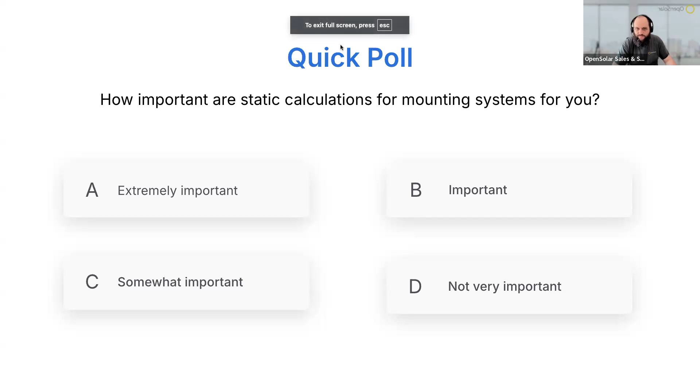So, the Renusol mounting system. I will walk you through the Renusol mounting systems portfolio quite quickly and focused. Renusol is a mounting systems supplier from Germany, based in Cologne. The company has existed since 1997, so we have more than 25 years of experience, based on simple solid service - our three pillars, which we're very proud of.

Speaking about the product range, we have flat roof products, and of course on-roof products. For tiled roofs, we have specialized products for the UK - plain tiles, pan tiles, etc. - with MCS certification on that product range as well. We also have nice products for metal roofs, corrugated roofs, trapezoidal roofs, and standing seam. Next one, please.

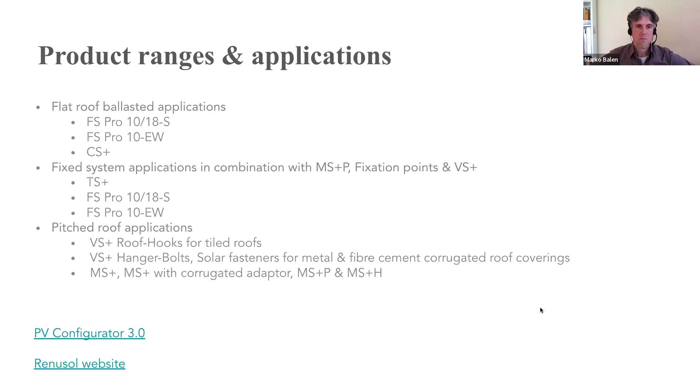What we're very proud about is our quality and certification. I mentioned 27 years of experience - we couldn't achieve that without quality and rigid quality control. We think that is very important for you as a customer, because you want the safety that the mounting material you're putting on roofs lasts for at least 20 years. We can warranty that due to several facts: our experience, and second, the extended certification that we undergo.

Which certifications are we pursuing? We have MCS certification for the UK, certification in Germany with the DIBT, a building approval institute, and certification in France with ETN. We also do a lot of other tests and trials to determine the functionality of our system, with TÜV in Germany, Kiwa in the Netherlands, etc.

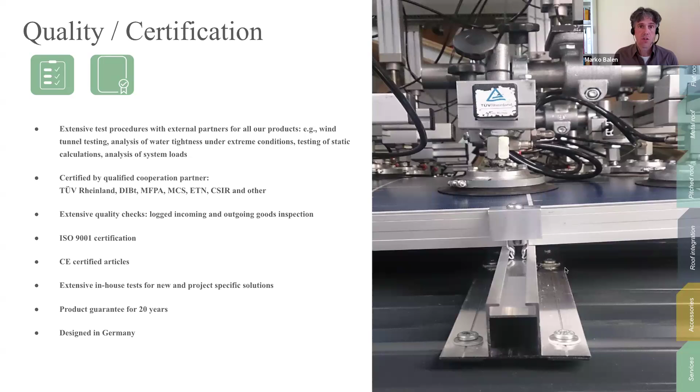Why do we want that? Because we think that the static calculation is very essential for the quality of the project. And therefore, we give you a tool, the PV configurator, which is available now in OpenSolar as well. With that tool, you can easily do a static calculation and ensure the quality of the system.

We are doing business in Europe and in South Africa. So you're seeing here the countries where we are doing business in, and where our systems are designed for these markets specifically. So we have, for the different markets, very specific solutions. I mentioned the UK - we have very specific solutions for the roofs that are in the UK. We have two colleagues on the ground in the UK who can support you, who can give you technical designs, who can answer each and every question and are happy to serve you.

Our product range and application is for every kind of different roof - flat roof, metal roof, pitched roof. And then we have, of course, our first-class services. We have a technical team, trained engineers who are doing designs for you, who give you help and assistance with your problems, specifically with projects which are more difficult, but you can call them at any time and they will give you advice and help. Of course, we have different accessories which I don't want to touch on in much detail, but everything you need, from potential equalization, grounding, different applications, are available there.

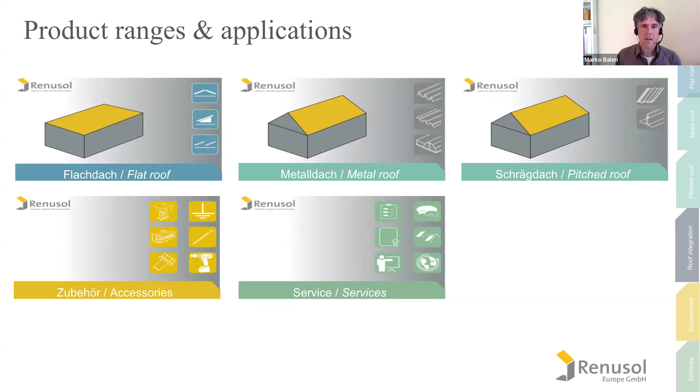So for the flat roof range, we can fix solar modules on every kind of flat roof. The difference with our flat roof systems is that they work until 5 degrees of tilt of the flat roofs. Many producers limit it to 3 degrees. We are not doing that because our systems are designed for temperature dilatation, so we can deal with roofs up until 5 degrees tilt.

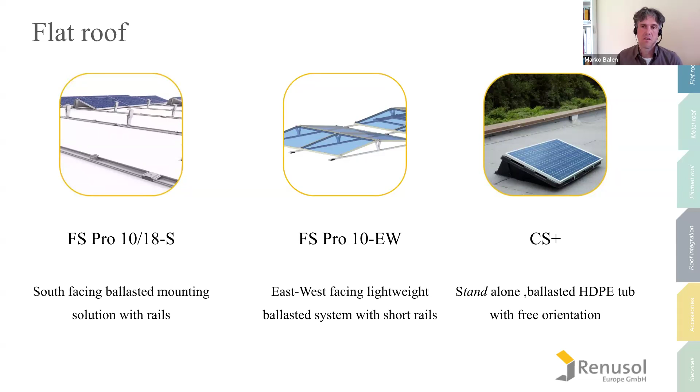Basically, we have 3 different product ranges: the FS Pro system for east-west and south-facing application, and the console, which is a plastic tub that can be put on the roof, which can then be filled with ballasting material, and then it's one component for one solar module. Very easy, no rail connection, very flexible on the roof, but of course you have a little bit higher need for ballast.

So FS Pro is our new standard for flat roofs. It's a pre-mounted system, so the rail, the protection pad for the roof, and the ridge support and eave support are already mounted to the rail, so you get one part on site. You don't need to do fiddly work on site. It's very quick to mount. We have the values there for the system - it's 30 to 40% quicker to mount than non-pre-mounted systems.

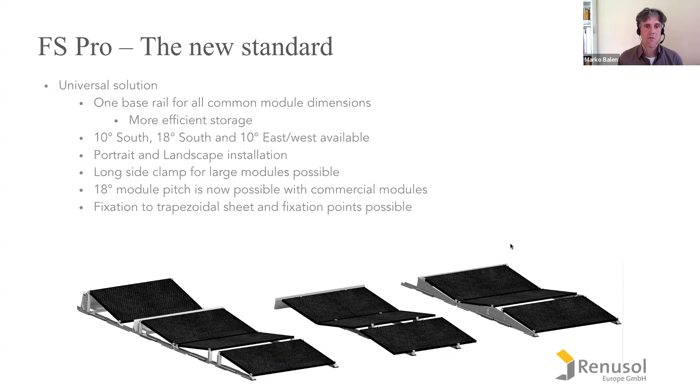We have different options for south-facing, for east-west facing, in 10 and 18 degrees orientation. We can put the modules also in landscape. All the testing is provided, and we have latest state-of-the-art wind tunnel testing, which is implemented in the PV configurator. And in the PV configurator, you can then do the ballast design, or you can give the project to us and we do the ballast design for you.

So I mentioned the high degree of pre-assembly, 30% faster to assemble than non-pre-assembled systems. 20 years warranty, reduction of diversity leads to simpler storage.

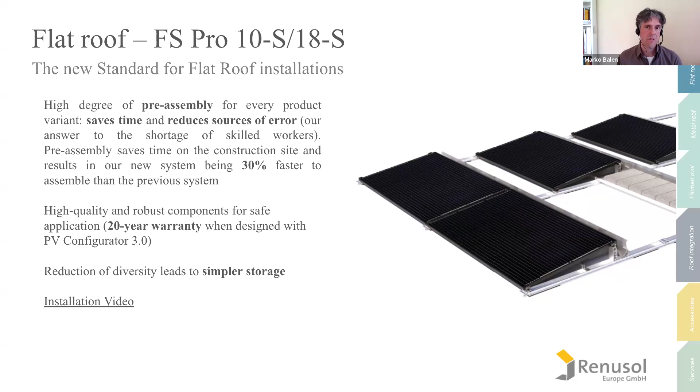So with the FS Pro, we can fit literally every module size in one rail, so you don't have the issue that with different module sizes, you need different mounting systems. Ours is universal. We have integrated potential equalization, so you are saving time there - you get the potential equalization with the product, you don't have to care about it. The ridges and the eaves are pre-assembled, and also the roof protection is pre-assembled - you only have to unfold. And you get nice side deflectors if you need them for a static reason or bird protection.

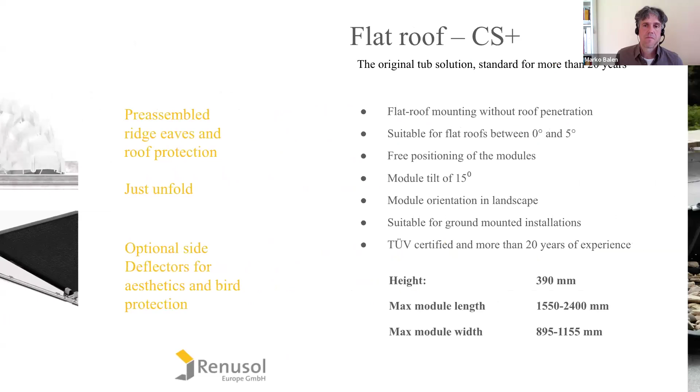Flat roof CS Plus is one of the first products of Renusol - more than 20 years that this product has existed. It's still very popular; people like it because it's flexible. It can be easily put on every roof. You don't have to use rails which connect the separate rows. And you can use it also on ground mount installations. We did big ground mount installations in the Netherlands and in Sweden, where multi-megawatt projects have been put on the ground with this system. It's very convenient because you don't need to ram profiles into the ground.

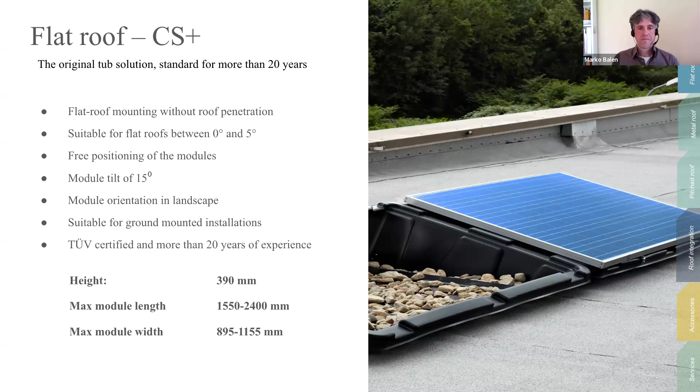If we want to install modules on, for example, tile roofs, and they should have a tilt, or trapezoidal roofs or standing seam roofs with a tilt between 10 and 35 degrees, the TS Plus is the right product. It's a triangular system, very flexible. We have a full static calculation in the PV configurator, very easy to install. So this is a product if you need higher tilt than 10 or 15 degrees.

Next one, please. So this is one slide which explains the different combinations.

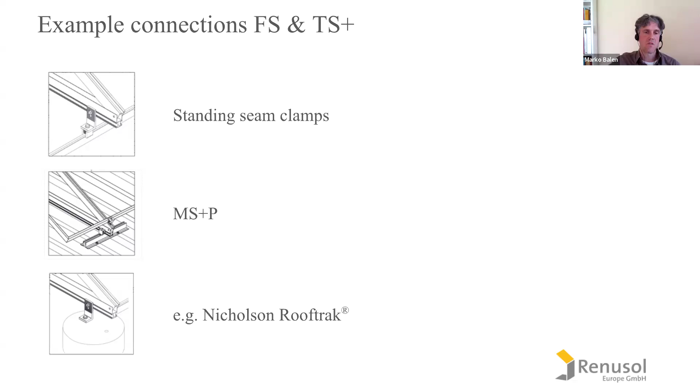So if you want to attach the flat roof system, the FS Pro, or the TS Plus system to standing seam roof, we have different very good standing seam clamps which you can use. If you want to attach it to trapezoidal sheet, it would then be the MS Plus range. We have also a cooperation with Nicholson in place, a very good producer from the UK, which provides integrated fixing points to all kinds of flat roofs, and the holding values, the static values of these integrated fixing points are implemented in our PV configurator. So you get a complete design, not only for our mounting system, but also for the fixation.

Next one, please. So for pitched roof, we can mount the system on tiled roofs. We have a large variety of roof hooks which you can use depending on the exact roof coverage. I already mentioned standing seam, which is a

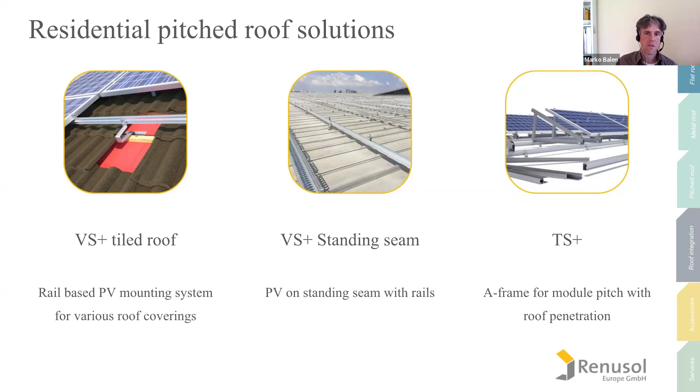quite an application which comes quite often. And then you have the TS Plus if you want to apply the modules with a tilt on the roof. Next one, please.

So for tiled roof, we have here the VarioSole. We have 22 different roof hooks in the portfolio for every kind of tile. We are always trying to reduce them, but it's very hard because, as you know, every roof in Europe looks a little bit different, so we have to provide all the variety.

Quite recently, 1 or 2 years ago, we brought out the Renusol RH1 roof hook and the RH flat. And the RH1 roof hook is very important because it has very high holding values, so it has very high static values. Therefore, you can save a lot of roof hooks on your roof if you do a static design, if you do a calculation in the PV configurator. Then you can save material, and not only can you save material and material cost, you can save a lot of working cost because you know that you need time to install every roof hook.

I don't know, 5 minutes or something, to notch a tile, etc., to install it, and you can save that by using components which have a high static capability and who have a static design. And using our PV configurator is a tool to make your system economic and feasible.

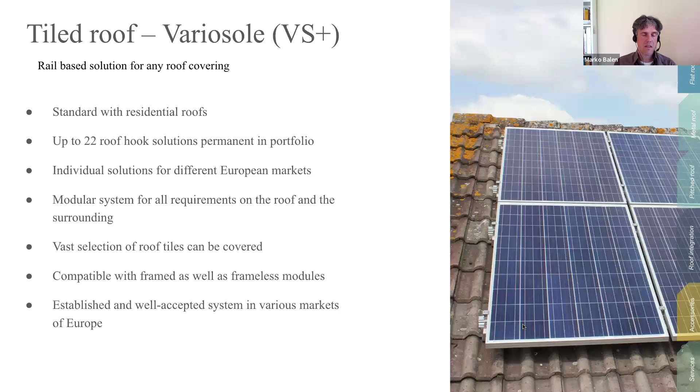Next one, please. So these are the roof hooks, the RH1 and the RH flat, extruded aluminum roof hooks with a wide area of adjustability. So you need less cuts, you have a stronger system, and you can fit it to literally all the roof coverings in the UK.

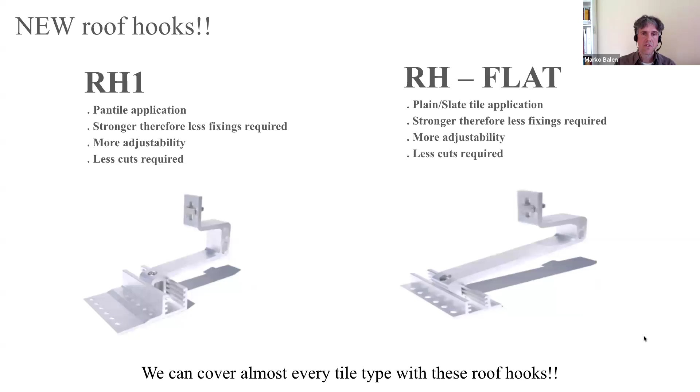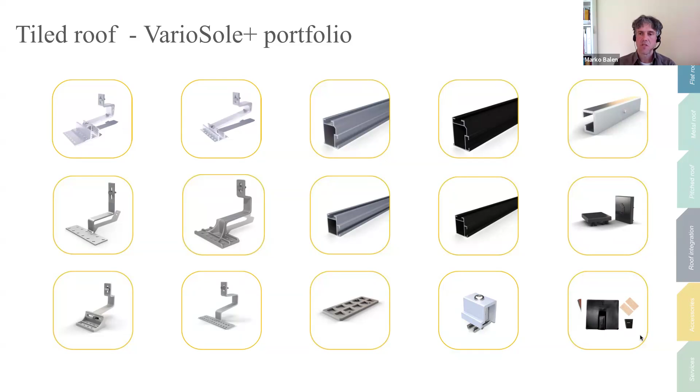Next one, please. So this is the whole portfolio for tiled roofs, different roof hooks, different rail, then end caps, universal, and then we have also flashings in the right bottom corner. There we have a cooperation with Genius Roof Solutions from the UK for the UK market, and they have designed specifically flashings for our product, and they go together very nicely. And we have tested them for the MCS, so we can prove they are watertight and you don't get any problems in 25 years of lifetime of your system.

Next, please. We can skip that.

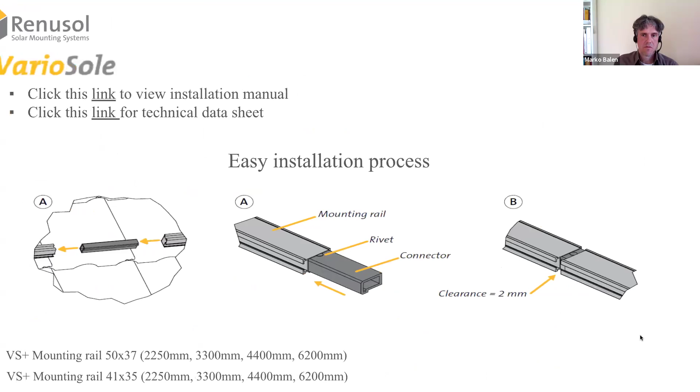So for metal roofs, we can either attach to the metal roofs with hanger bolts. Here we have a wide variety of different hanger bolts in order to get the right application. Next, please.

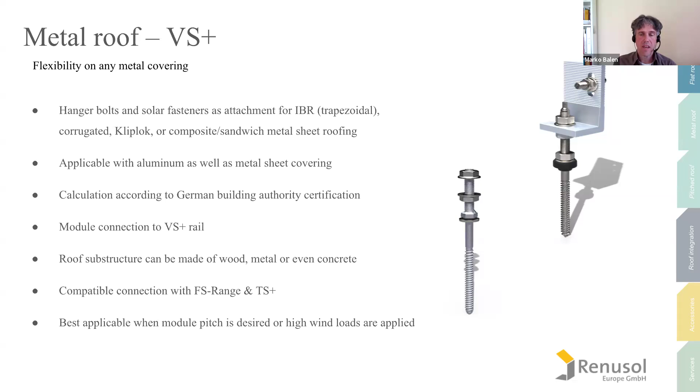Or we can use the Renusol system. And Renusol was the inventor of the short rail system on trapezoidal sheets. So we were the first company who did that. And we have quite some experience with that, and the market or other competitors have followed us with that system.

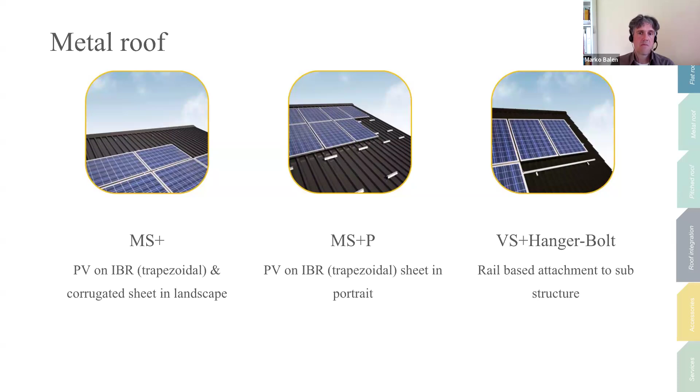If you go to the next slide, please. So we have this short rail, which is then attached with two metal screws to the trapezoidal sheet. No pre-drilling required, absolutely watertight, very easy to install, very quick to install, and very economic. Next, please.

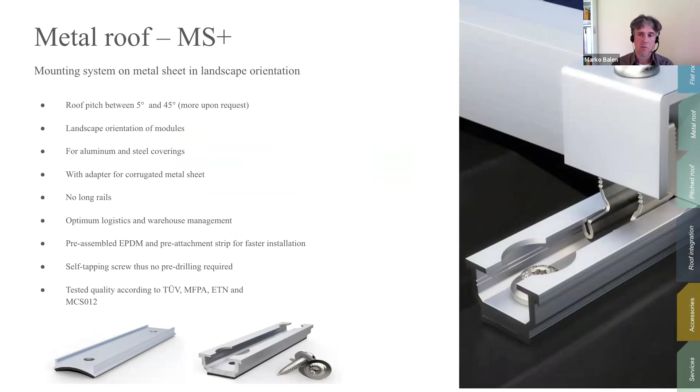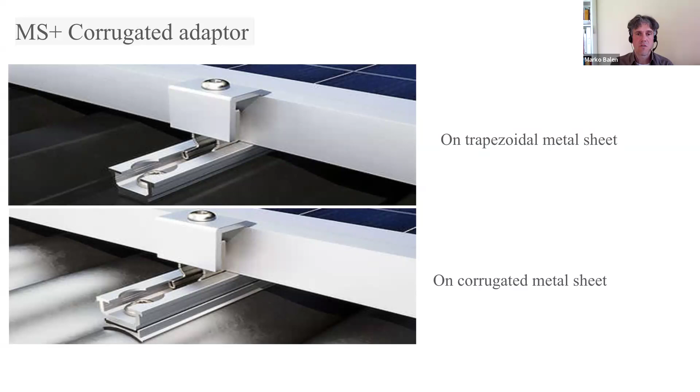So here you see also an adapter if you have a corrugated metal sheet, shown at the bottom of the slide. Next, please.

And if you want to install the modules in Portrait, we have the MS Plus Portrait rail. Next, please.

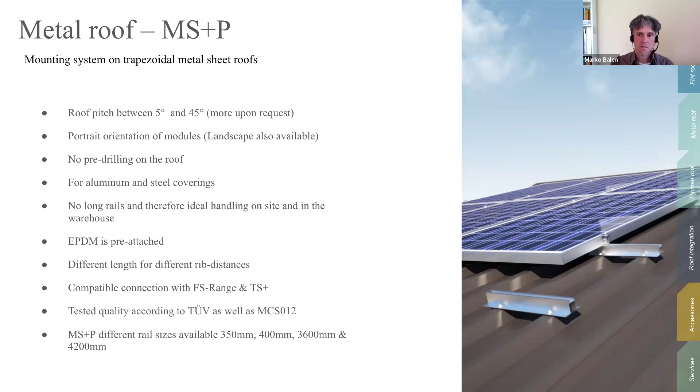So for every metal application, we have the right coverage, and not only do we have it, we have also made extensive wind uplift testing for all the combinations of different roof coverage and our mounting system, and can prove that it has the right holding values. Next, please.

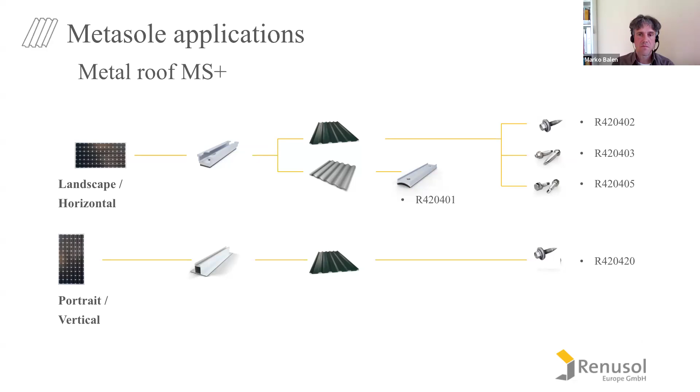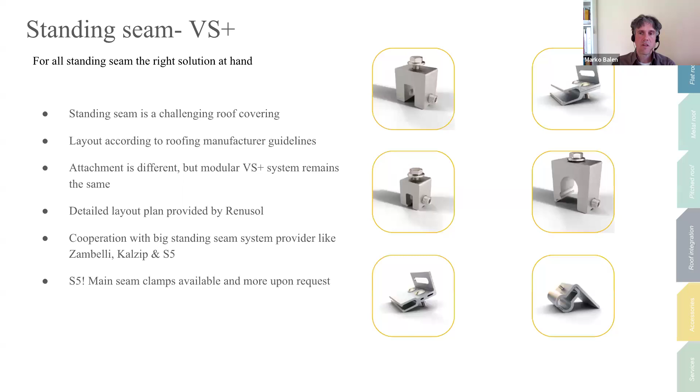So you see different seam profiles that you will find on the roof. And for all these combinations, we have the right system to fit on, and you see it also in our PV configurator, which one is right for your application. Next, please.

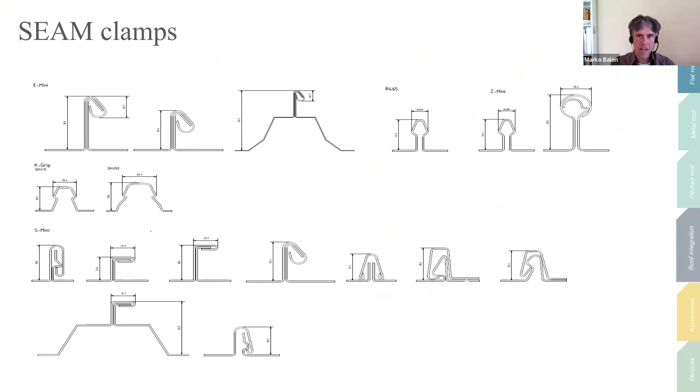Our module clamps are universal, and we were the first company to have a universal clamp ranging from 30 to 50 millimeter module thickness. And we are the only company which has a universal clamp, which is the RS1. I think it's on the next slide.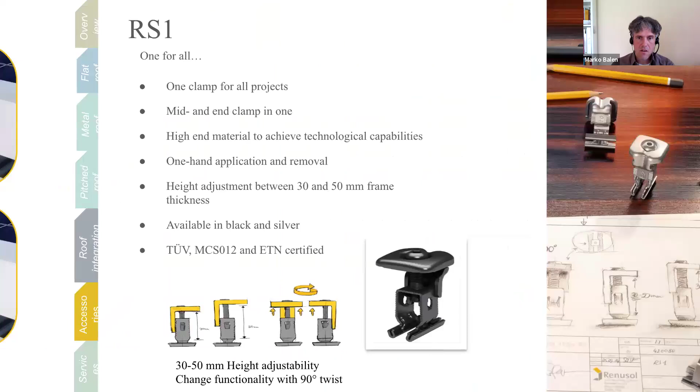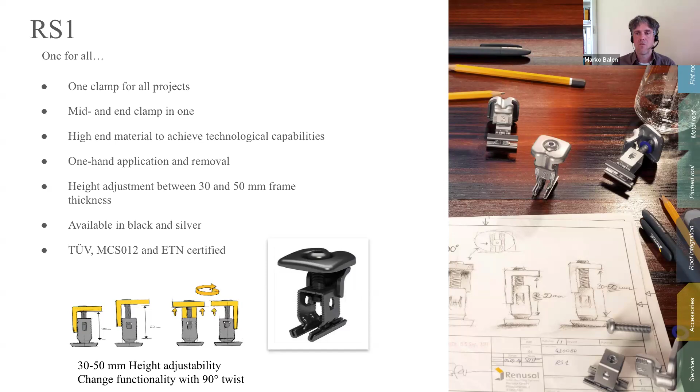Yeah, here we have the RS1, which is the Renusol 1 clamp. Here you have a mid and an end clamp united in one clamp. So literally you need on your job site only one clamp for all your applications. This is what we understand under simplicity. We don't need 30 different components. No, we need one, and we can do the job. Next one.

Different accessories for bonding, wire management. We have bituminous shingles. We have sample boxes so that you can show the product to your end customer. Next one.

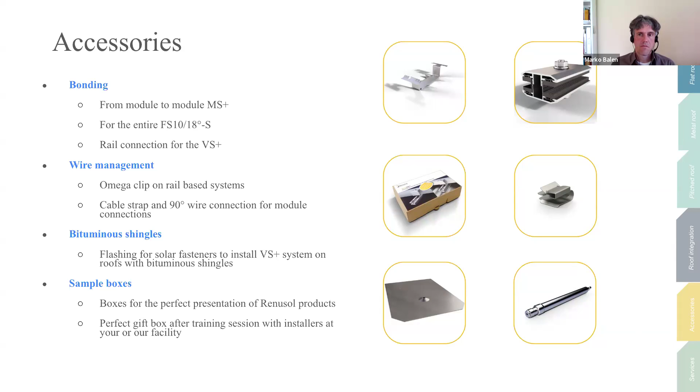And we have the nice PV configurator, which is the design tool for our systems. You have the implemented static calculation in it. And why do we want you to do a static calculation for mounting systems?

Yeah, 3 reasons. One is safety. We want the systems to be safe on the roof, and if we do a static calculation, we can ensure that safety, so it's for your own peace of mind. Secondly, it's reliability. You want it to last for 25 years. We want systems that stay on the roof, that don't fly from the roofs, that don't cause damage and harm to people. So reliability is a second factor.

And thirdly is the warranty. We're giving you 20 years of warranty if you do the design, if you do a static design, because then we have a full-fledged system. Not only do you have first-class material, but you have combined the material with the calculation, and you can ensure that it's safe. So warranty is the point.

And we do believe that insurances will ask in the future about the static calculation of a PV system. This is the case in some countries. In some countries it is not, but this is a trend which is growing, and this will be the case within 1 or 2 years in all the markets, I firmly believe, so be prepared for it. The next one, please.

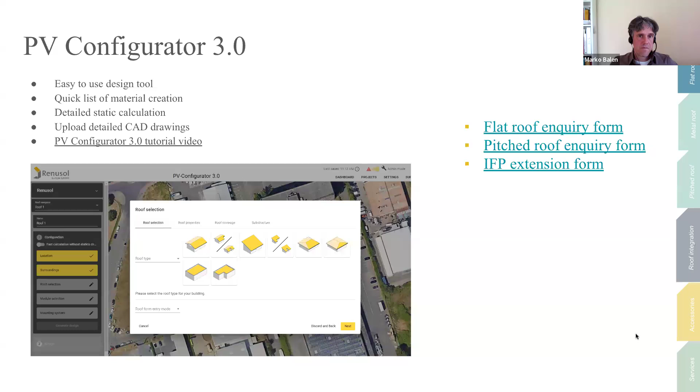Yeah, website renusol.com. You will find all the information that I have given you and much more. Next one. Thank you, that was the introduction to Renusol.

So now an introduction to OpenSolar. Hello and welcome, we're OpenSolar. We're mission driven to accelerate the adoption of solar and renewable energies globally. We're 100% free of charge for you, the solar professional, to use us. We cover the entire world.

Our core values and an overview of OpenSolar: we're world-leading solar design software. Again, we're free of charge, so you are free to grow, and it's built by solar professionals for solar professionals with a combined 400 plus years of expertise through the teams.

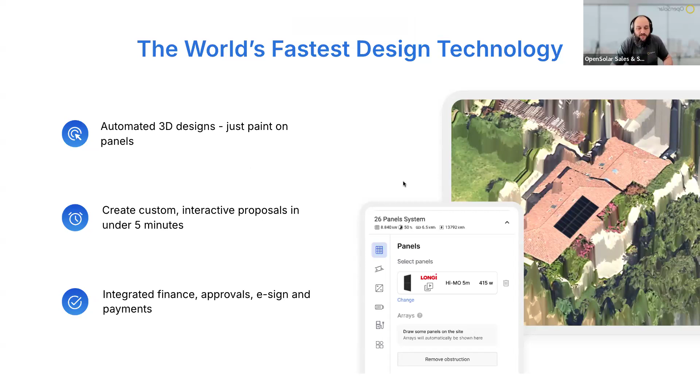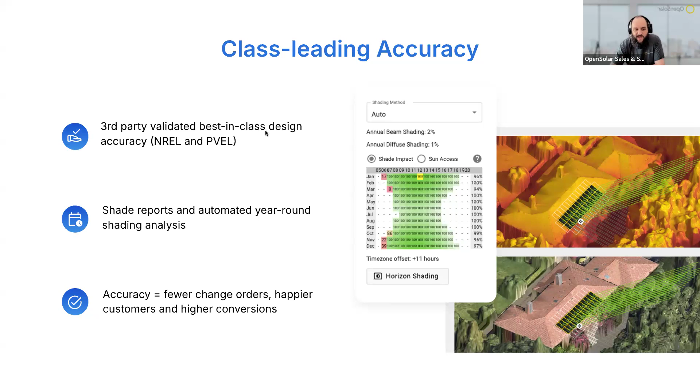We do also have integrated finance, approvals, and e-signatures, and we've just launched a new payment system within the OpenSolar platform called Cashflow, which I'll go over in a second. Our world-class accuracy has been independently tested, and you can find all this information on our website. You're able to generate automated year-round shading profiles, so you can show your customer when their panels are being affected.

We're an all-in-one solution for you. We've got a built-in CRM and workflow, designated smartphone and tablet applications, an open API so you can connect to whatever you need to connect to, and post-sale documentation and install packs, manuals, and everything you need for the MCS in the UK.

So we have, as I said, Auto 3D. We have a new shop added so you can get live pricing and availability of stock. The system can generate a schematic for you or an SLD. We're fully MCS compliant with all our documentation and our calculator. We have a beautiful document management system, and we are the full beginning-to-end sales software as well for you.

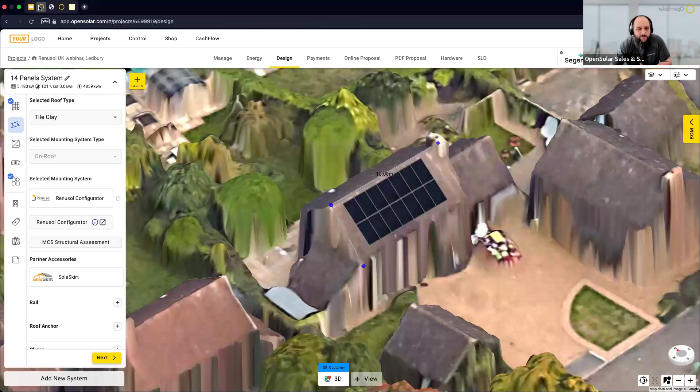I'm just going to swap over to show you a quick demo of how the Renusol system works within the OpenSolar platform. So Marko will join in and explain certain details.

I filled in the customer's details and the energy. I've started my design here, but now we're down to entering in the mounting system. I'm just going to click Renusol configurator here. Restart the Renusol configurator, I apologize.

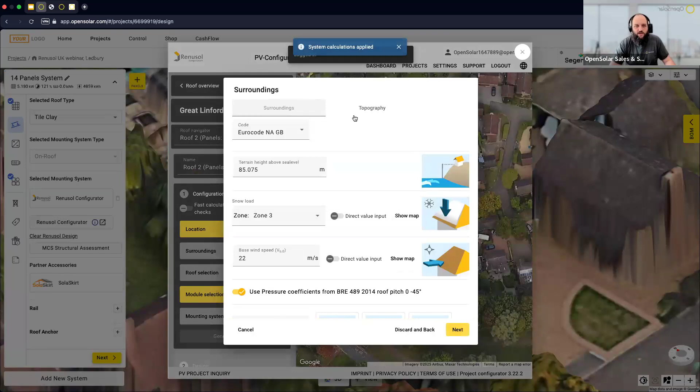What we see here is that the snow load and the wind speed have been automatically calculated according to the location of your project. This information has been transferred from OpenSolar to our PV configurator, so this is very important.

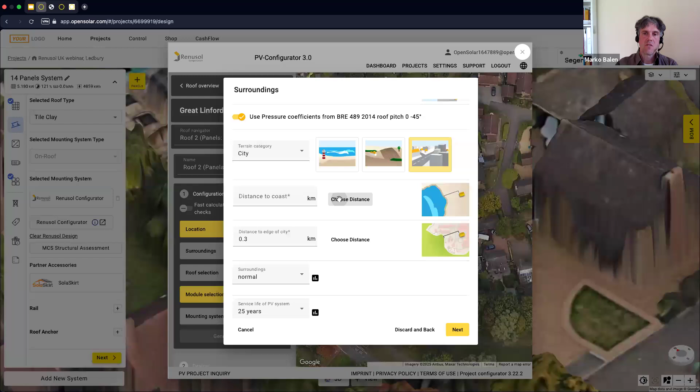Now you have to determine the distance to the coast — this is for the wind load calculation, very important. The terrain category, which we skipped very quickly, is an important point. I want to highlight that the terrain category has an immense impact on your wind load: the lower the terrain category, the higher the wind load.

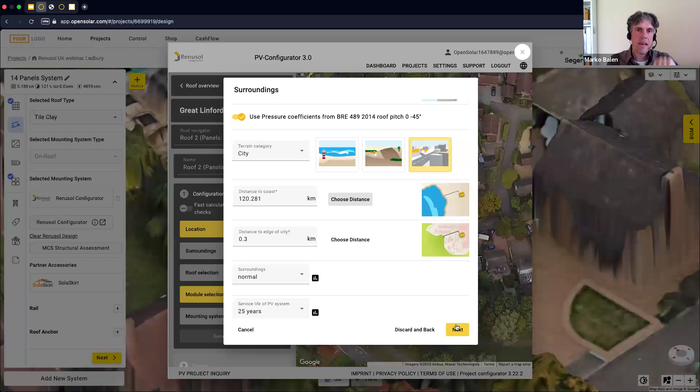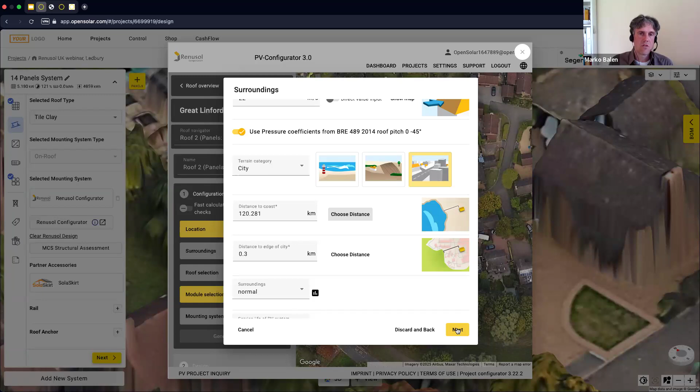Why? Because if you don't have that many buildings — say that field with the tower, you're on the beach with no coverage by other buildings or trees — you have full impact of the wind, so this is your highest wind pressure. The higher on the terrain category you go, like in the city, the lower the wind load gets. If you don't know exactly which terrain category you're in, it's good to choose the lower one to be on the safe side — you get slightly higher wind speed and wind load, but you're safe. This is how engineers would recommend doing it.

Here we can choose if our building is exposed. What does exposed or not exposed mean? It would be exposed if your building is built on a hill or a small mountain, because then you'd get additional wind loads.

Why? The higher your building is from the ground, the higher the wind speed, because you don't have as much friction from the wind. The wind exhibits friction on the surface of the earth, and the higher you get, the lower the friction and the higher the wind speed. This is why windmills are built 50, 60, 70, 80 meters high — because there you get maximum wind speeds.

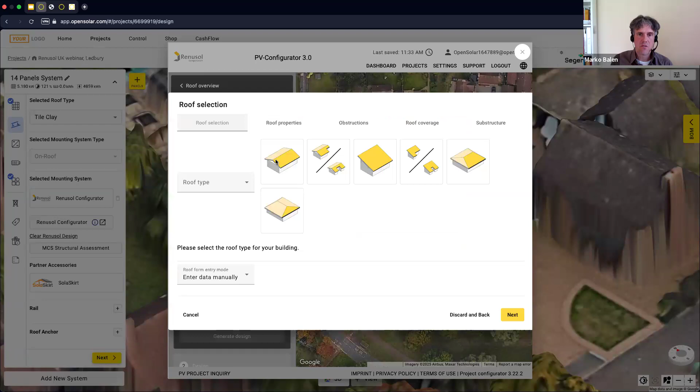So we've chosen not exposed. Now we can choose the type of roof that we have, and the type of roof is important not only for geometric reasons, but also because we want to know the exact wind load on the roof.

The form of the roof determines which wind load you have on the roof, and also in which different roof zones. As you may know, on every roof you have different wind action, wind speeds and wind pressures, and this is defined by the geometry of the roof. Therefore, we have to take the exact geometry of the roof. So if it's a gabled roof or a flat roof, it's completely different. The codes and standards define which wind loads we have to take into account, and we have all the relevant codes and standards in Europe built into our calculation model.

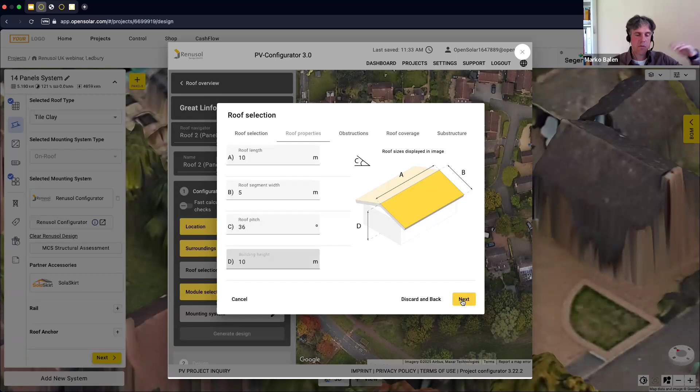Next, we are introducing the roof length and the roof width. The roof pitch has been taken from OpenSolar automatically. The building height is a very important factor. If you don't know it exactly, try to gather this information, because the higher the building, the higher the wind load, so you have to get that parameter right.

Now we can choose the roof coverage of this roof. Here you have different options, as I explained. We are choosing a plain tile roof, and here we can define the batten spacing, the batten height, etc. These fields are pre-filled with values which are right in 90% of all cases. If your case deviates a little, you can fill in other values, but they are marked with black fields, with these black icons.

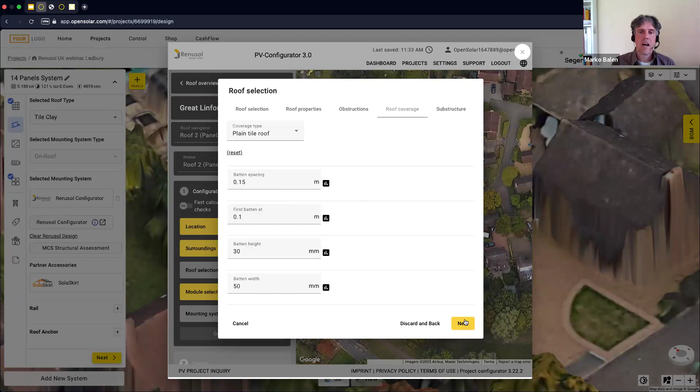Now we're defining the rafters, and this is of course very important information. As you may imagine, the spacing of the rafters is quintessential. If it's very wide, then each roof hook gets a higher load, and the rail could bend more easily than if the rafters are closer together. So we have here a spacing of the substructure of 600. For the UK, we will introduce a more typical value of 400 perhaps. We can change that value to 400, leave the other values, and go to the next field.

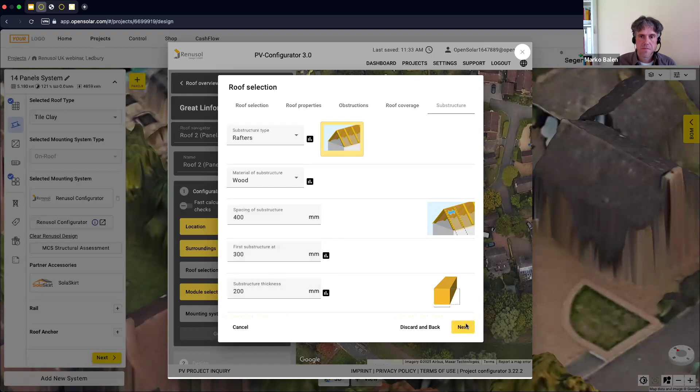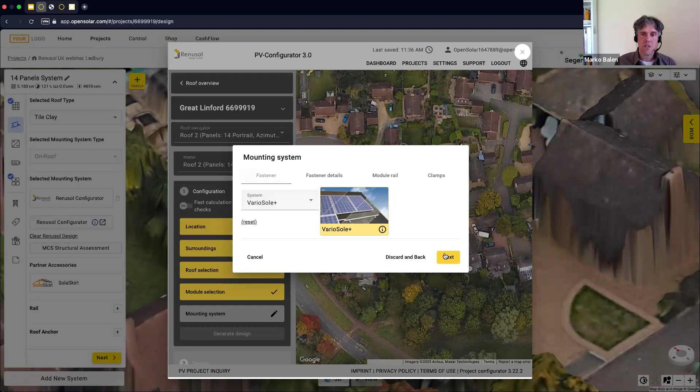Now you see we can choose different systems. On the roof that we have defined by now, we could install two different mounting systems from Renusol. One would be the on-roof system called VarioSole+, and the next one would be the in-roof system. But we will choose the Renusol on-roof system now, which is typical for this application.

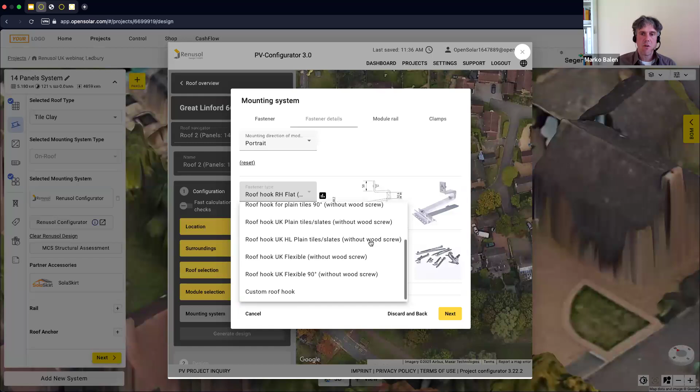Now we are defining how to mount the modules, either in portrait or in landscape. We have chosen portrait, obviously. If you go to the fastener type, there you see all the different roof hooks usable for this application, and most of them have a small icon, a small drawing, where you can get the geometric values. Not all of them, but many of them have this, so you can check if this roof hook would fit the tile that you have on the roof.

We will choose the RH1 roof hook on top of the list. RH Flat, where is the RH1? It's the top one, it's just called RH. Okay, we'll choose that one.

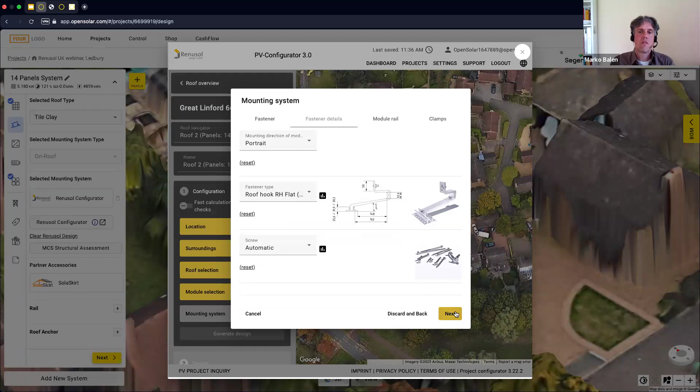Here you can choose the clamps. I mentioned the RS1 clamp, or the mid and end clamps. We'll choose the RS1 clamp in the color black because we have black modules. Now we go to next.

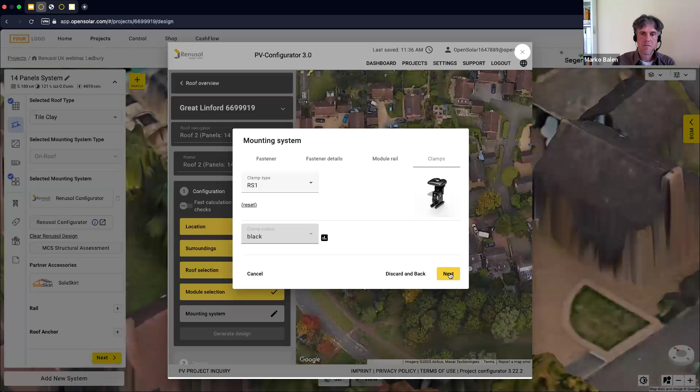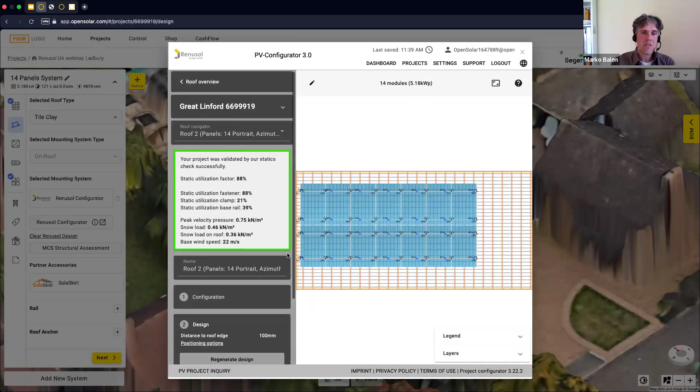Now we go to the static calculation. We can adjust the module field. And now you have seen the static calculation has been performed. The box is green, and for this project we have done the full static calculation. You can see that the fasteners, meaning the roof hooks, are utilized by 88%. The clamp is only used by 21%, and the base rail by 39%.

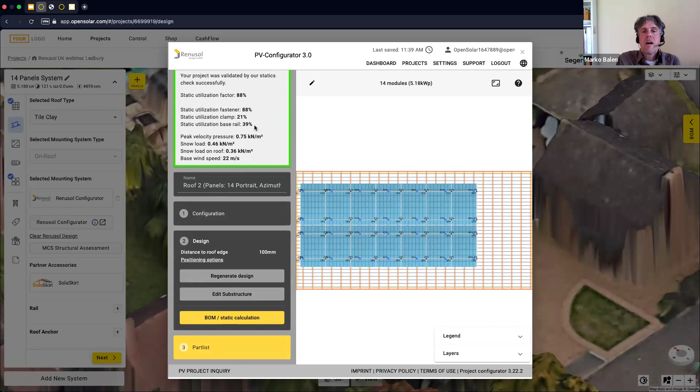Now what I would recommend is to get the report, the full static report. You go here to Project Report Extended, and then you can download your documentation for that project.

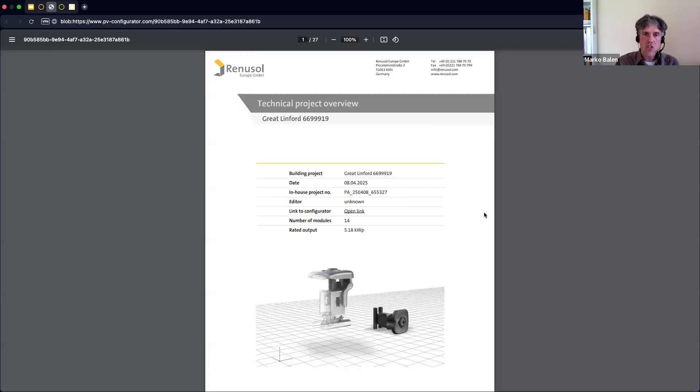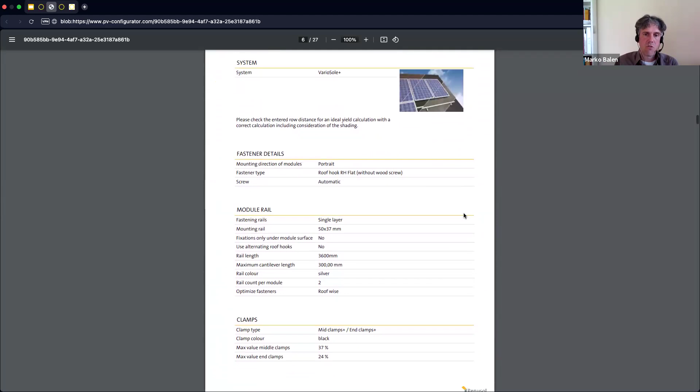And what does this documentation do? In the first part, it only explains what kind of roof, what is the location. Here you see the location, what is the type of roof that you have, which module have you used for this calculation, and then it says which module rail has been used, which clamp has been chosen.

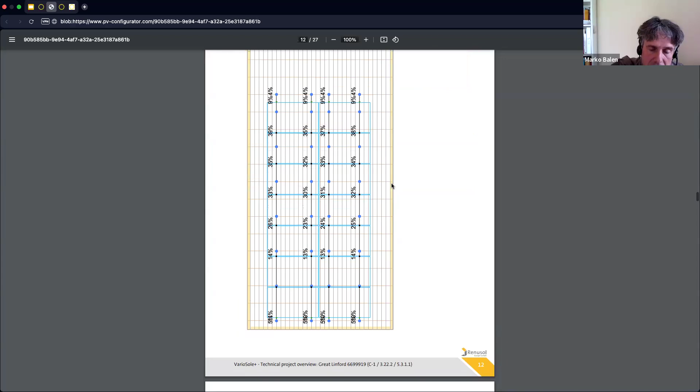The system is shown very nicely, and then you have the result of the static validation, that it's okay. You have drawings which you can use on site in order to build the system, with the static utilization of each and every component shown in the respective place.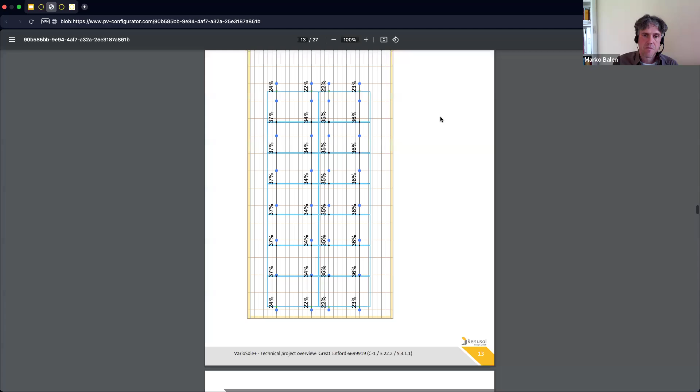And this would then be for the module, for the roof hooks. So here you have the drawing, how to mount it. You get a bill of material with the item numbers, with the quantity, with the weight.

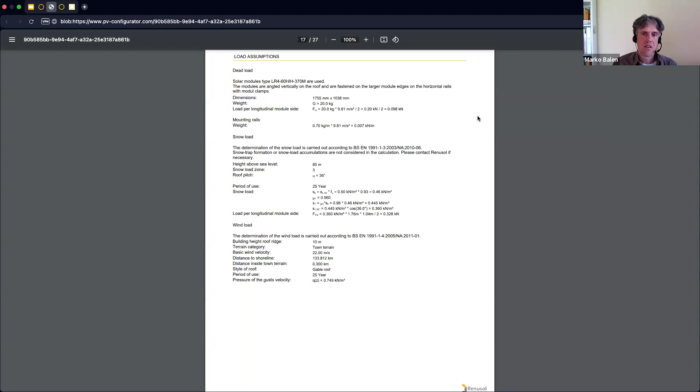And now you have the documentation of the static calculation, and this is very important. Here you get a list with the dead loads, the snow loads, and the wind loads. And we don't only write down the loads, but we also write down how we have calculated it. This is different to other competitors who give you a piece of paper that says nothing to an engineer because it's not documented. We are completely open about our calculation, how we have done it, and a proof engineer can check it easily. So next page, please.

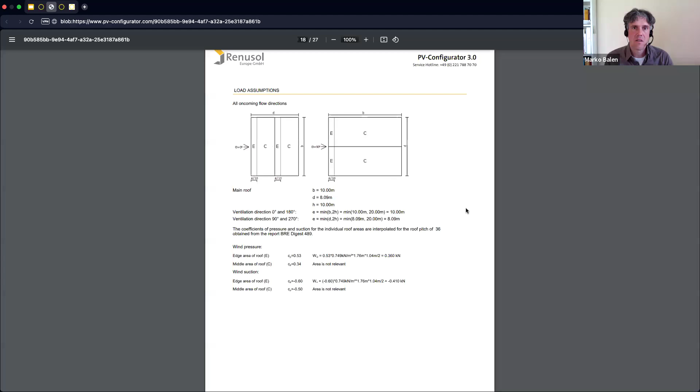Simple as that. This depends on the zone on the roof in which you place your mounting system. The more you place your mounting system in the edge zone, in the corner zone, the higher load you get, and we calculate that exactly. Some manufacturers say, leave out the edge zone, don't build your system in the corner zone. But from our point of view this is nonsense, because you want to use the whole roof. The best version is to put some roof hooks more in that area, and we define that by the mounting plan you've seen before and by the static calculation.

Okay, next one please. Now we are calculating all the different load combinations, meaning dead load plus snow load plus wind load in different combinations with the safety factors. There you see factors of 1.35 and 1.5, so all the loads are multiplied by safety factors. In codes and standards we talk about a safety level for the static calculation, and this is about 2. So we have a safety of approximately 2, that no system will fail. Or you can say in the codes it is allowed that one system in 1 million systems built fails. This is the security that we want for buildings, for high-rise buildings, and that we also want for mounting systems, for solar systems.

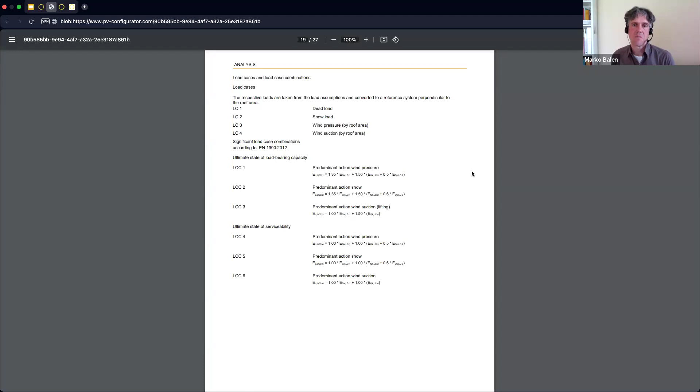Okay, next one please. These are still the load combinations which we have now calculated, so we have the relevant values.

Next one. And now we have a calculation of the components which get the highest load. So we have a roof hook in the corner area and it gets the highest load, or we have a clamp mounted in the corner area of the roof that gets the highest load. We look at that load and divide it by the resistance of each component. We have made testing, we have made calculations of all our mounting components. We know our clamp can hold 500 kilograms of load until it breaks. Then we define an admissible load scenario, which is only, say, 300 kilograms per clamp, and this is then the maximum load that this clamp should get in a static calculation. And then we have this safety margin and can ensure that nothing happens.

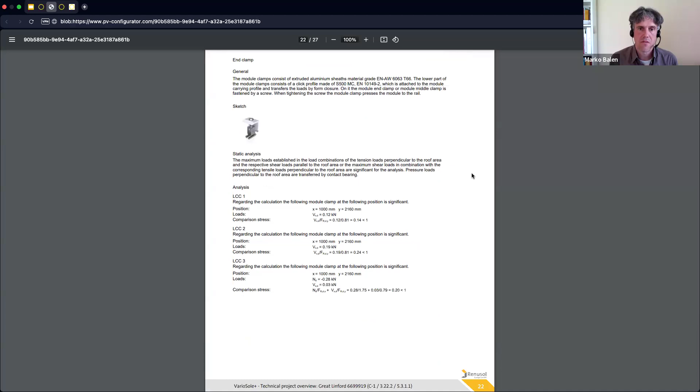Next one. So this is done now for the clamps, for the rails, and for the roof hooks. Here you see the static calculation for the mounting rail, and this should be now for the roof hooks.

This is the calculation for the roof hooks then, right? Yeah, and that's it. If you do that and have this calculation, you've done everything right, and you can sleep easily at night and not fear the next storm, which will come. We don't know when the storm comes, but it will come.

In the UK, there was a severe storm some months ago, I believe it was in February. It was a very high, very strong storm. PV systems were also damaged, and you want to make sure that the system you've built up stays safe and no harm happens.

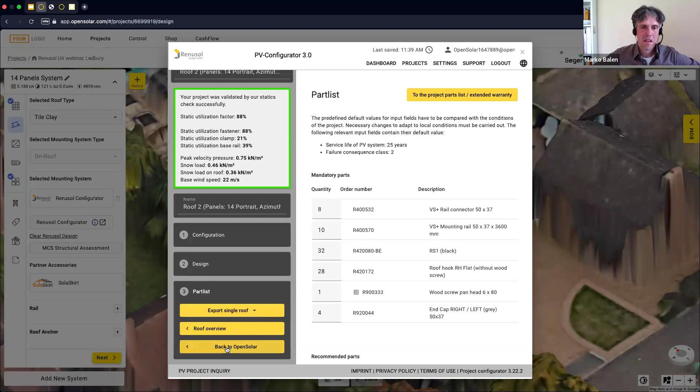So now, from there, with all the information gathered, we can go back to OpenSolar. The bill of material is transferred to OpenSolar, and you get the exact amount of material you need to finish your project. From there, you can add all the other components such as your inverter, batteries, and other accessories. You can also integrate scaffolding if required.

And then, of course, add in your pricing matrix to make sure it's priced correctly. But from there, you'll be able to send this to your customer.

On the online proposal, because we are using Renusol here, we have the Renusol details. As we can see, we've got their beautiful image, and we have their spec sheet about the product we've selected and added to our system. The customer, when they receive this online proposal or PDF proposal, will be able to see the product details as well, so they understand the product you've selected.

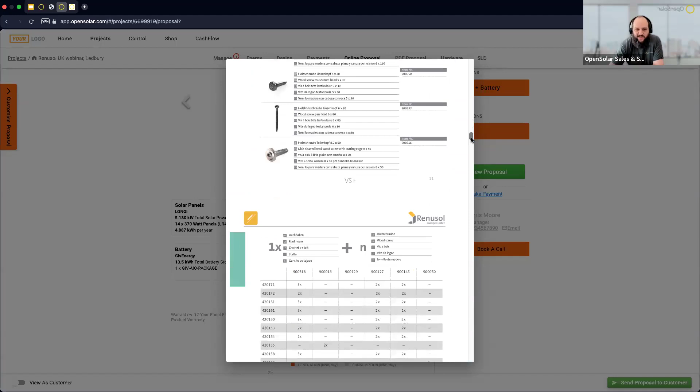This gives them that extra peace of mind that the products you've chosen are going to work perfectly. It gives them all the details about the product so the customer can view everything and understand what you've selected and added to their online proposal.

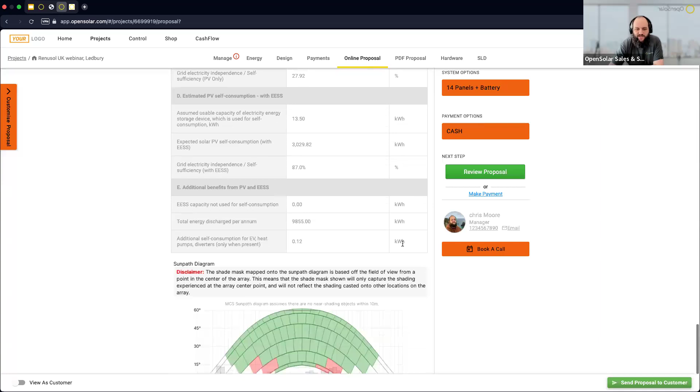From there, they'll have all the information about how the system performs, how it works, bill savings on their system, quotation tables, how quickly the system will pay back, environmental benefits, and of course the important MCS table and sunpath diagram are also included at the bottom.

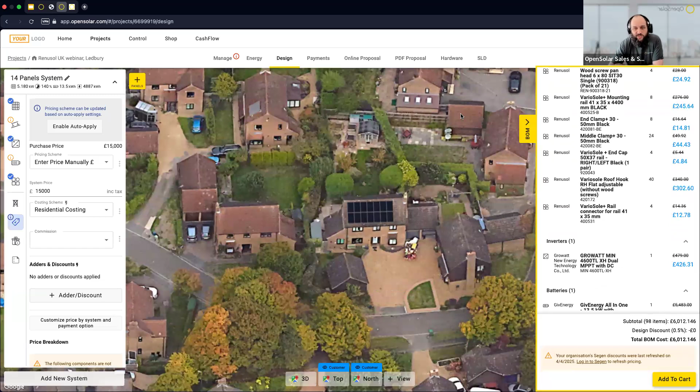From there, the customer can review their proposal, agree to the terms and conditions and your contract. As we said earlier, they can also digitally sign and accept the proposal. You can then take your order and pass it over to a stockist if you're working with one of our stockists, such as Segen or City Plumbing, or wherever you get your parts from. You can download a bill of materials.

Is there any questions, guys?

What about our questions, so with the poll results? Yeah, the poll results on the Renusol one: how important is the static calculation for mounting systems? Extremely important, and that was 100%. Okay, so very important. And on the poll results for how quickly on average do you do a customer-facing proposal, 30 to 60 minutes.

Once you're set up with OpenSolar, 15 minutes from beginning to end, and you can have a proposal to send out to a customer. Great improvement. Plus, having all the benefits of Renusol here just helps because you've got all the paperwork you need to complete your projects.